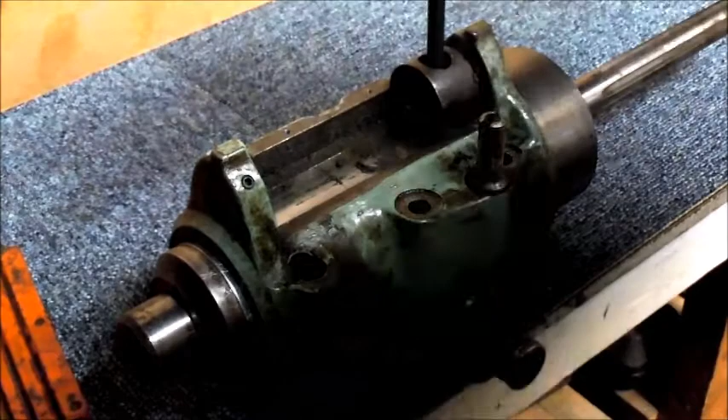So at this point I'm going to take the stop off, which is just a socket headed cap screw, and I should be able to pull that out. That's pretty standard, that's even on the J head, that's the same thing. That just comes out of there. That's the stop that comes down against the collar, and then the quill handle here unloaded, which was spring loaded, and then that should come out of there.

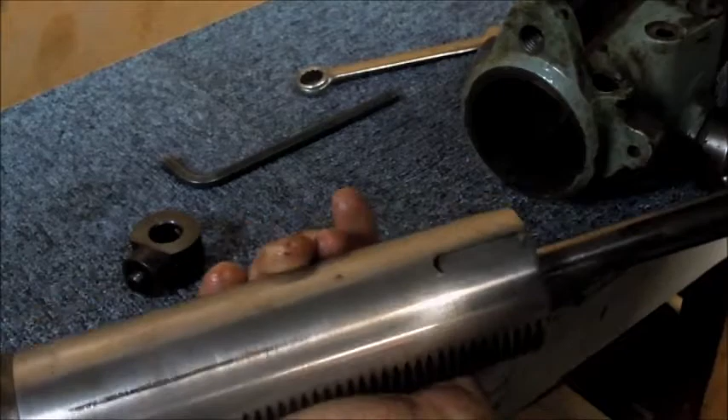Quite a bit of crap on there. There we go, that's out of there. That was about what I expected.

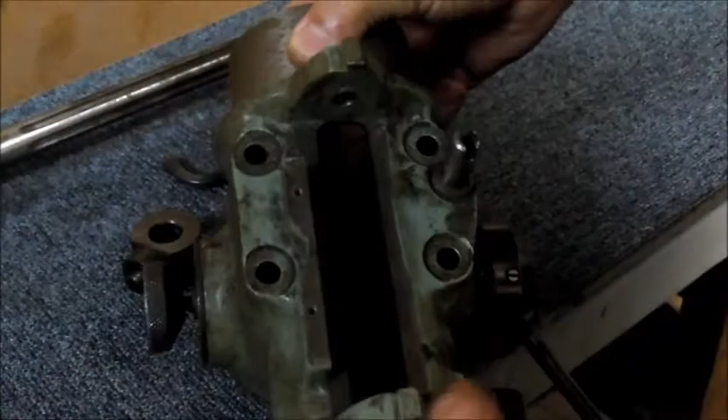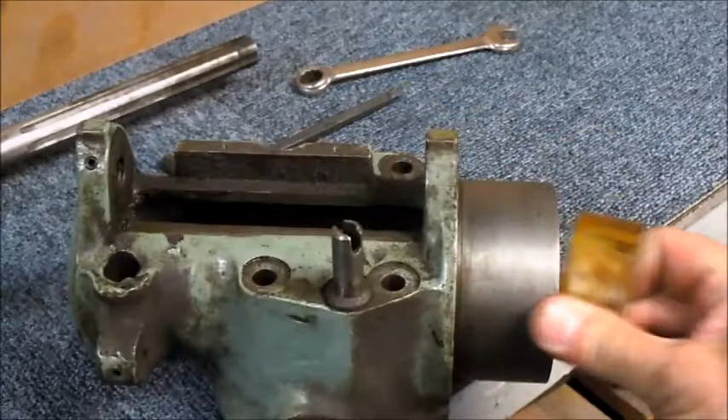So now as far as the head goes, now there's not much left other than the quill feed arm here and the fine feed there. I looked on the prints, that's actually supposed to be in there, I forget what they call that. But other than that, there's not a lot left in there.

This is the knob that locks up the fine feed.

And then what I'm assuming, based on this having this end cap on here, I think I got to pull that end cap off, and then all that should come out through this end.

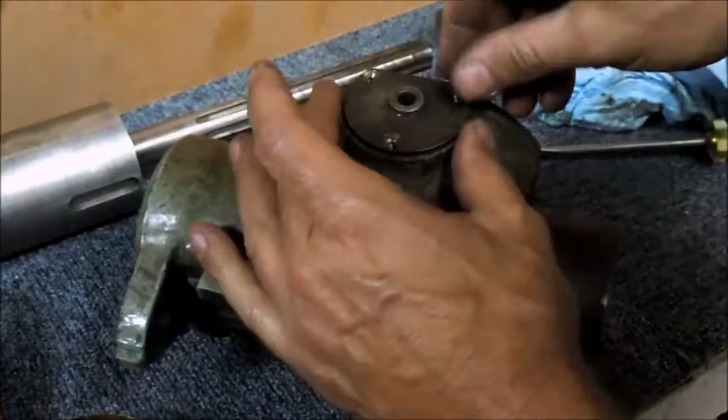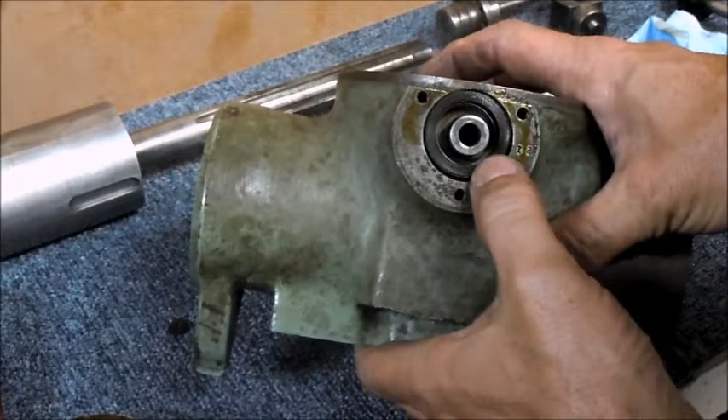Let's see what we get out of here. It's the last screw to come out. Hopefully there's no big springs or die springs in there. Ah, just a plate. But what that is, that is the actual spring for the quill handle. I gotta figure out, make sure I know how to get that out of there.

So what I can see, probably can't see that on camera, but when you turn the fine feed handle here, there's some sort of a worm gear or something, and I think what happens is when you tighten up that handle, it locks up a clutch system. But I think that prohibits this from going out, and this is held in. There's probably a split pin down here through this casting. It's actually exposed here, so I got to clean that up and figure out how to get that split pin out of there.

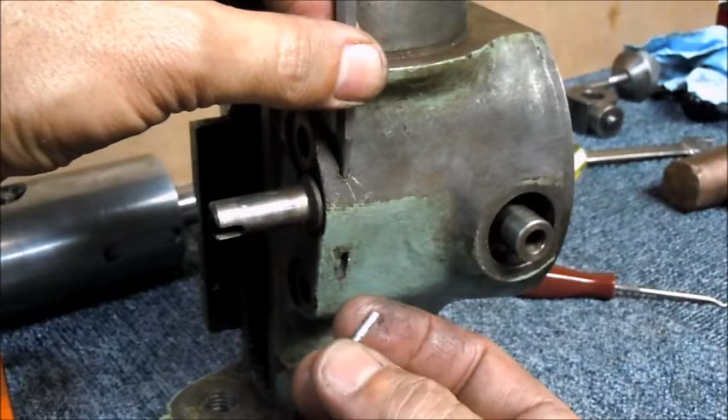I think I got the right punch here, and we'll see what happens. That's a solid dowel. I'm surprised, but it came out pretty simple.

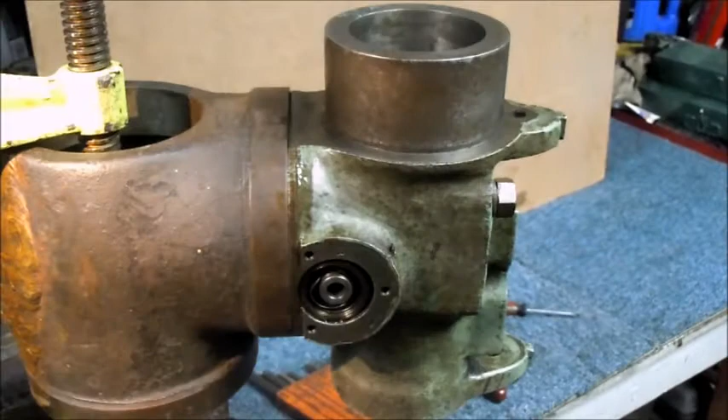One of the things I've done to help in the long term, I'm going to have a better setup, but for right now I've got one of the M Head adapters clamped into the vise, so what it gives me the ability to do is put the spindle on here and put it in positions and work on it.

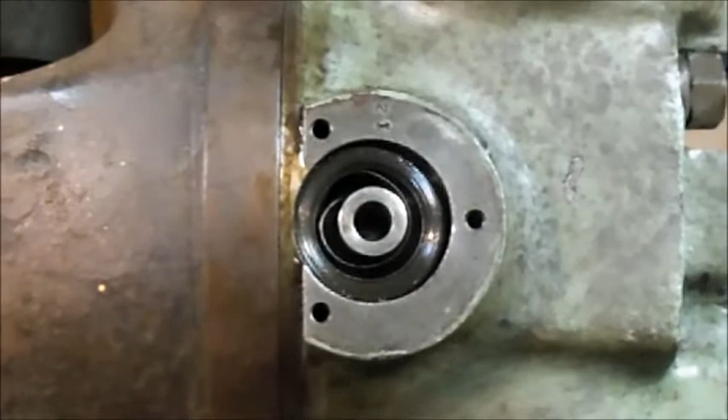And one in particular was this clock spring, getting that out of there. Well, I guess it's not really out of there. One of the things I'd suggest if you're ever doing this is the inside clip is a lot easier to get out than the outside clip. So the best advice I've got is leave this inner one clipped, wind the spring completely up so that it's tight on the ID, and then that leaves you a gap out here. There's a little tang out here that a hole in the spring clips over, and if the spring is sprung the way it's shown now, it's hard to maneuver the spring itself. So like I say, wind it in on itself, take the outer one out, and then it'll come apart a lot easier. So now the spring's out of there.

So I just want to verify, I'm going to look at the drawings and see what the heck's going on in there before I pull that out of there.

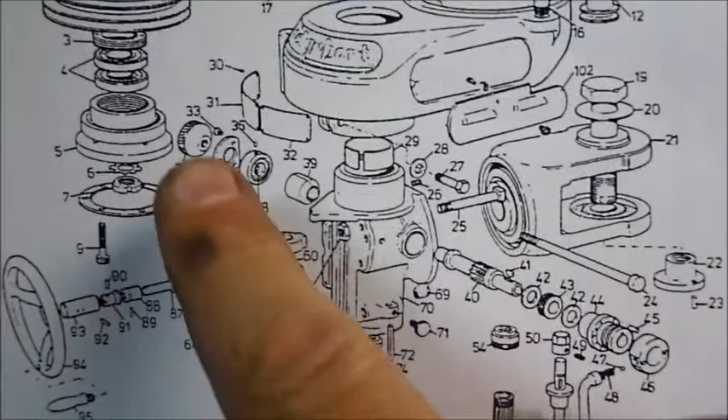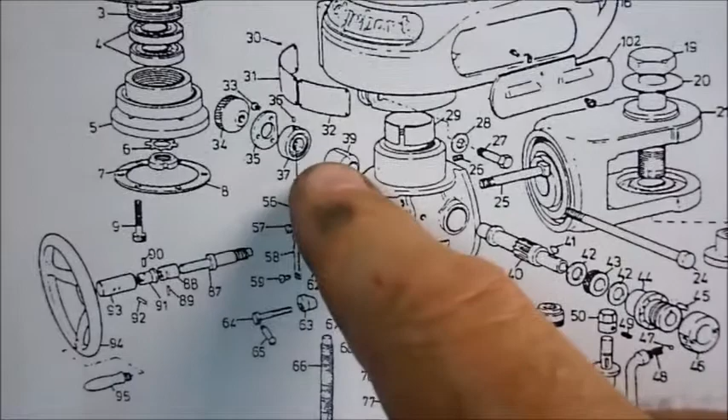So this is that's the part I'm trying to get out of there right now, and it looks like there's some kind of shoulder here, and that's the spline that connects to the spindle housing, keyway and stuff out here on this end. So I think that there, 39, that's a split bushing. 38 is the spring, and I've already got the cap and the knob out of there, so I think it's got to come out this way. And I guess it's the way they've got it drawn here too, with the exploded view, everything coming out this way. So I'm going to give that a try.

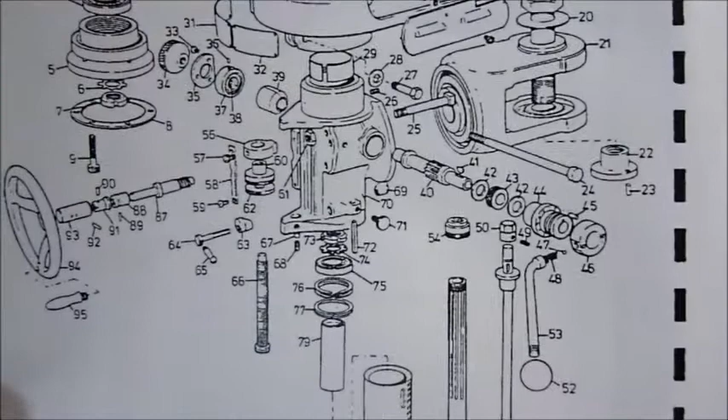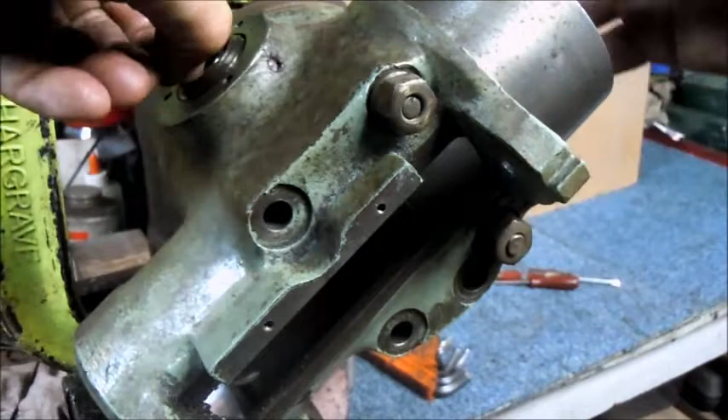First thing I'm going to do is try and get that spring out of there. I really don't want it to uncoil.

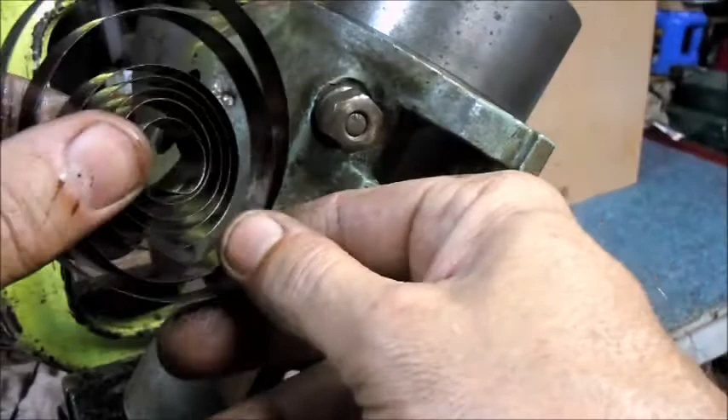And it's gonna... told you. I don't think I damaged the key or the keyway slot, so that's good. Actually, it went the other way.

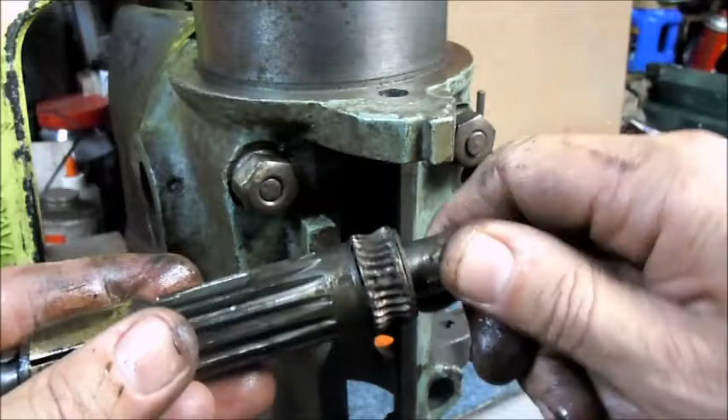That's just a split bushing. So I think what happens is when you're running the handle, you're running off of this key, and then when you tighten everything up, there's like a little fiber washer here. I think that's kind of, yeah, there's one on the other side, so there's two fiber washers on either side of this gear here. I think you're applying pressure to tighten that up.

It's really quite simple.

It sounds like Bailey texting me.

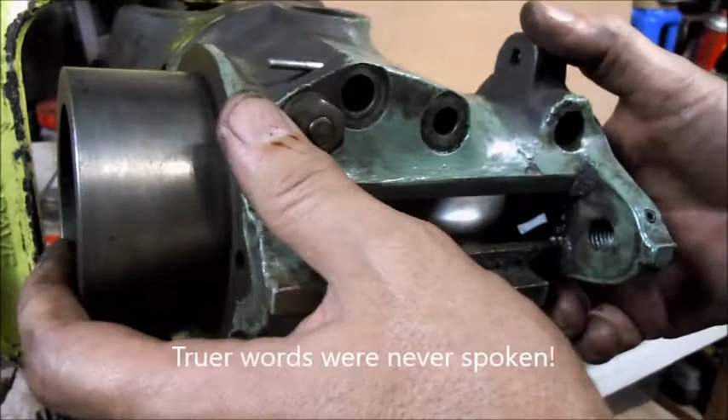So I think that's it, there's nothing else in the head. Now we'll start cleaning everything up and seeing what we got to do.